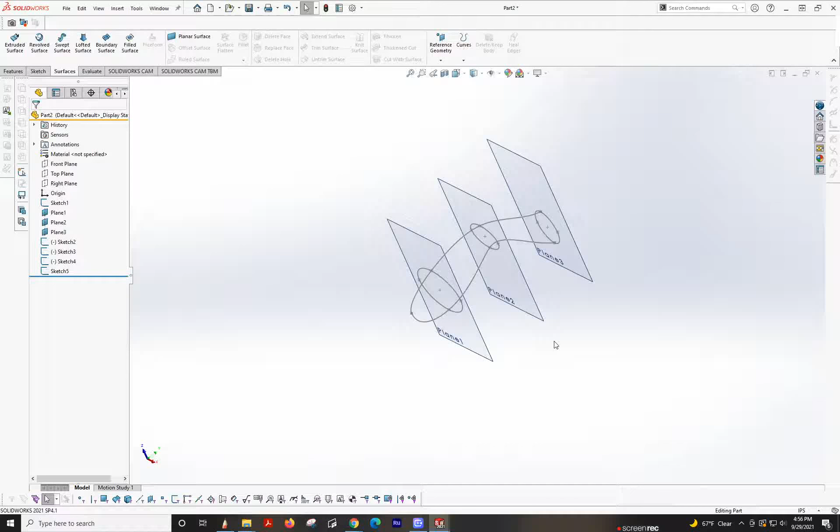Okay, so I'm going to go over a 3D sketch for, like, if this was a handle for a razor or a handheld something, right?

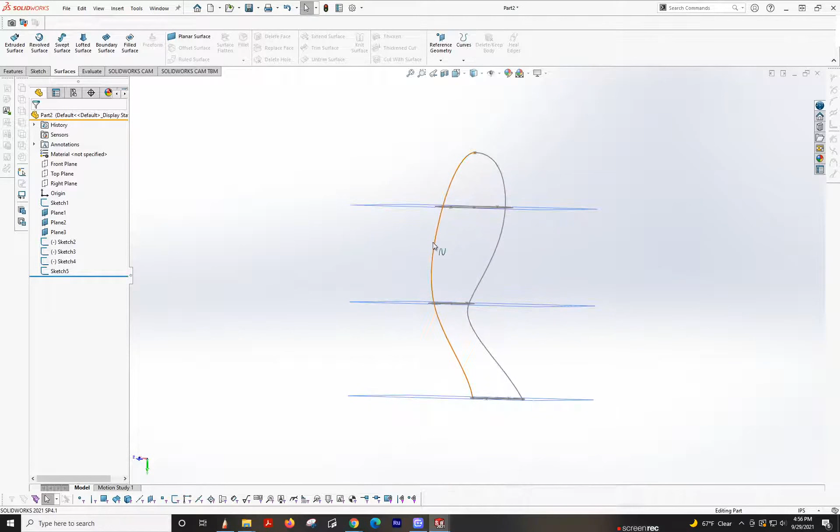So looking at this from the top down, this side, these sketches for the top and bottom are all on the same plane, so I didn't have to do a 3D sketch for these. They're just on the right plane. And then I made these planes, these are coming to a point.

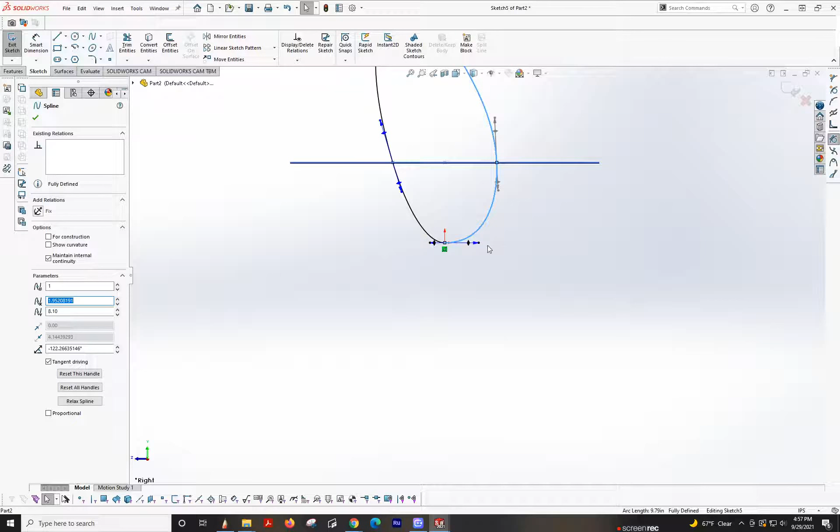So when I did these sketches, because this is going to be a rounded bottom, I did a point here, and then I did this sketch and then made it have a horizontal relation, and made this tangent to that, so now it'll sweep around. They're two separate sketches because it needs separate guides, not one. It won't work. And the point will make it so we can do a round end.

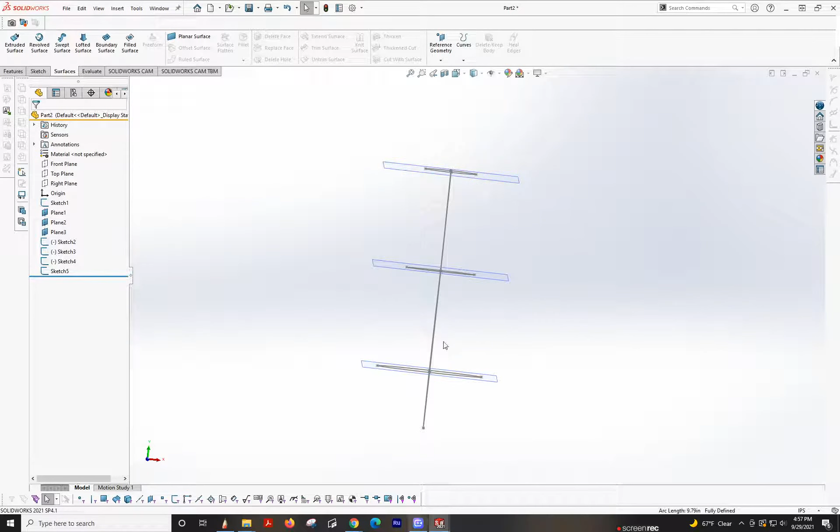So we got this, but how do we do these? Because you can't do a plane right here because it's coming out here, and you can't do a plane just this way because these are rolling like this. So we're going to do a 3D sketch because it's easier. For me, I like it better. Everyone's got their thing.

Than doing the projected sketch or whatever it's called - the composite sketch, when you have the sketch on the top and the sketch on the side and they merge. I like doing this better.

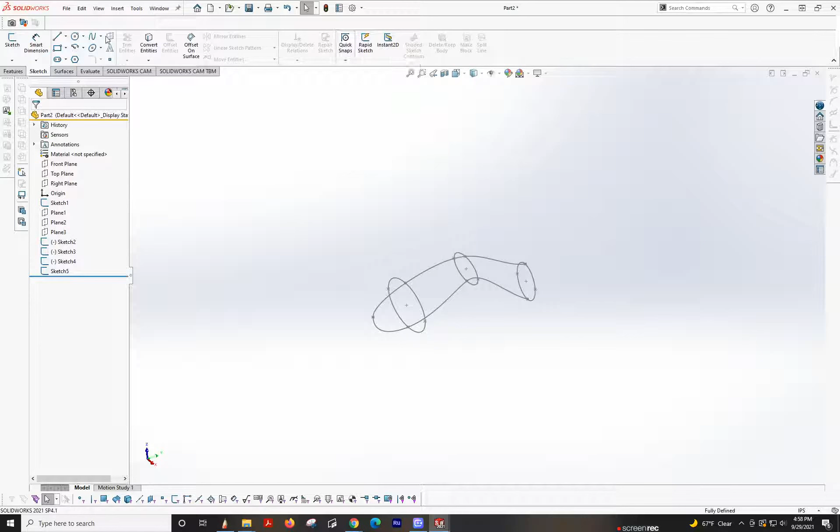So we're going to do 3D sketch, the spline. We're going to click on this guy, this guy, we're going to do all these, make sure the points are all where they need to be. So the trick, remember, is not to move the handles when you're in a weird spot, because things won't go how you think they're going.

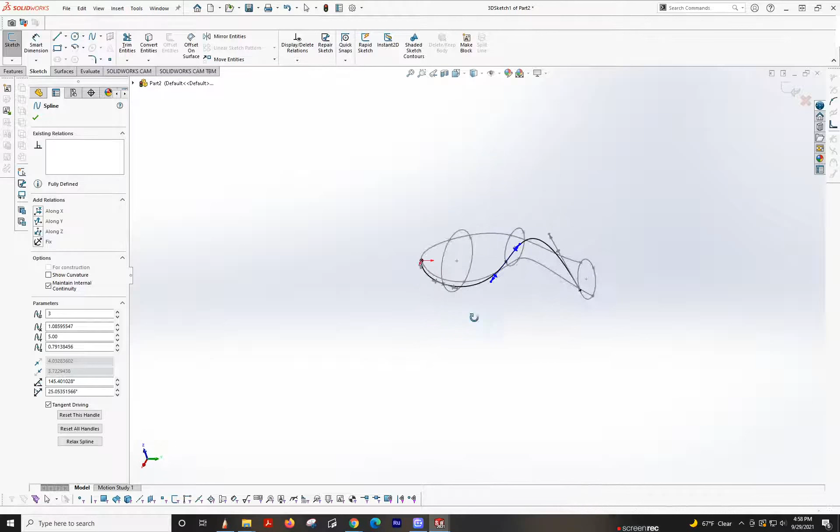See how it's going way back? We're only going to move handles in direct views. So this is going to kind of curve down a little bit and swoop here. This guy is going to come like this. Actually, I think that's pretty good.

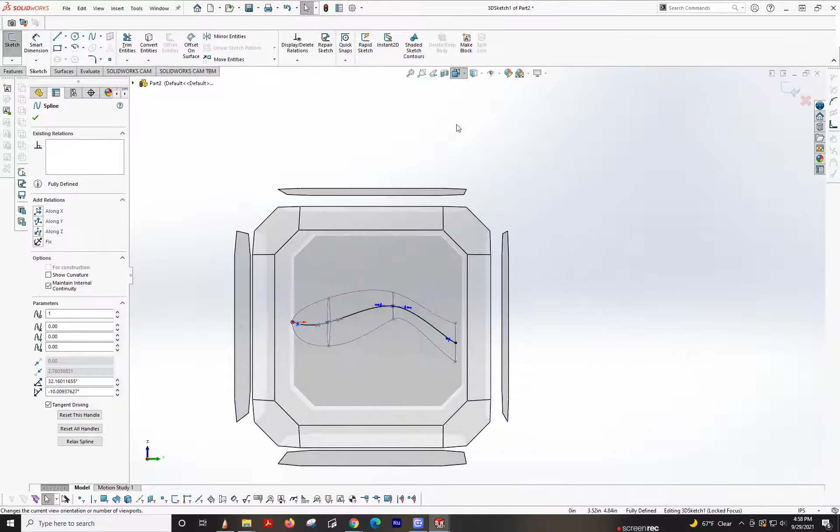And now we're going to look from the top. This is wonky, but we can move this and not have it screw up how it's going the other direction because it's only moving on this axis. This is very bulbous.

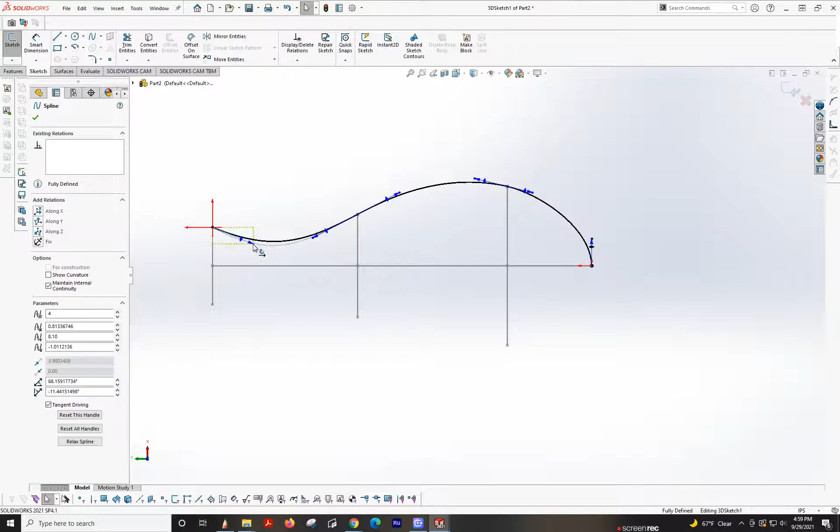Okay, so we're going to get this guy along X, and we'll see how that looks. It just has to be tangent to the other side, so I'm thinking this will work. Okay, so let's bring that in a little bit. Might be a little weird, but I think it'll be okay.

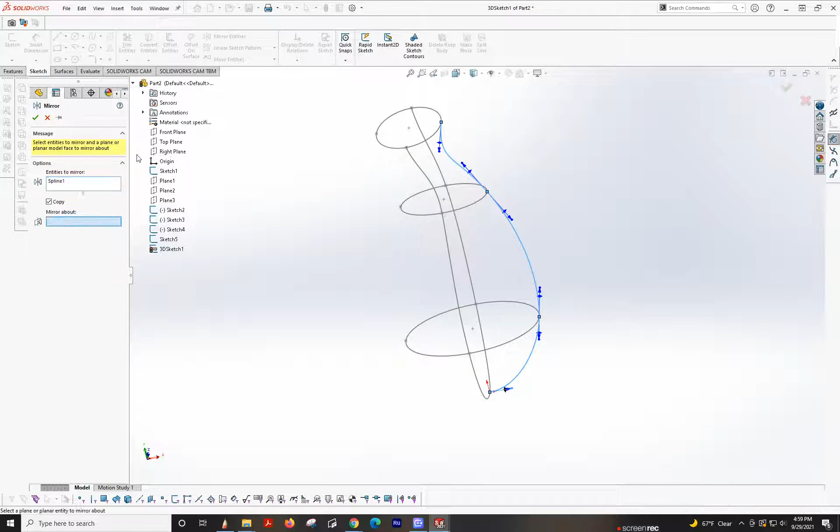Okay, so now we are going to mirror this sketch, because we can, on the right plane, copy, and then just do this collinear. I think that'll be good. Just do that to be sure, because we want a nice rounded bottom edge there.

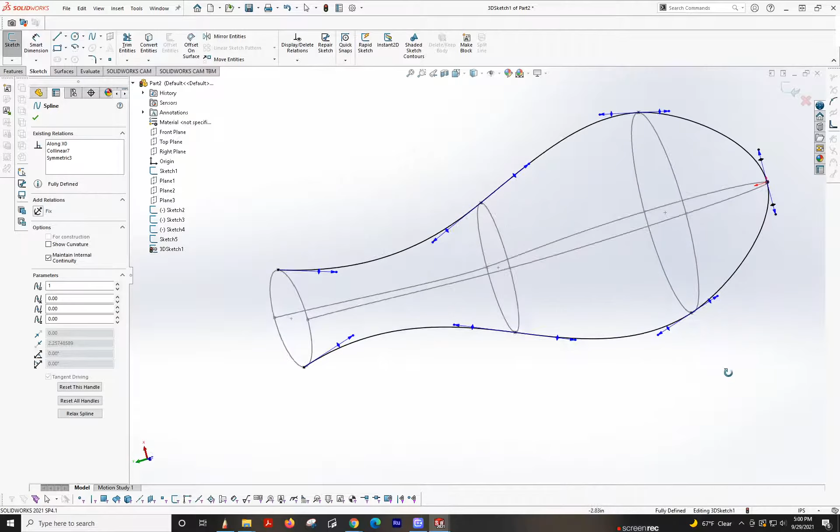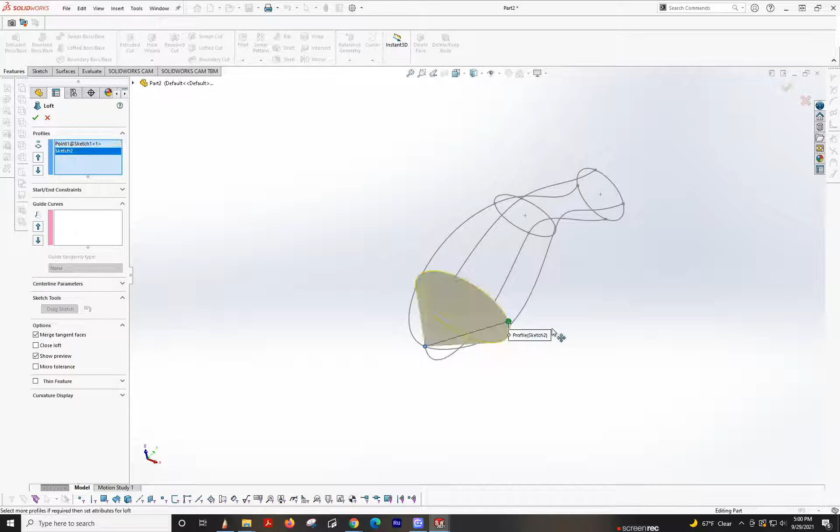Okay, so you can kind of see the wireframe. Okay, so now we're going to do loft, of course. Feature, loft - oops, no, okay. Point, and then I'm going to do this outer here, clicking along the same, and then if I need to, I can just roll it down onto that point. I did that just because this guy was on there and didn't want to select that.

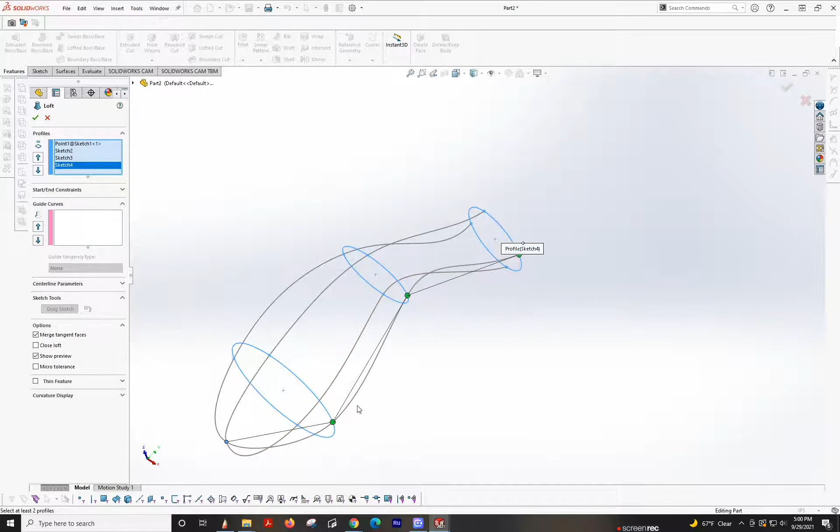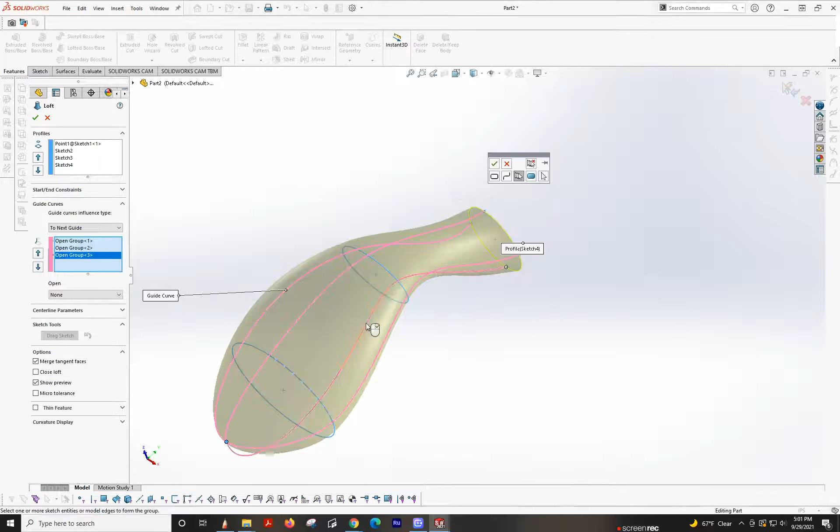Okay, so now we're going to do this guy. Oh, nope, clear - see how it said both sides? Selection manager, yes. Selection manager, yes, selection manager, yes.

There's a couple spots that I would for sure...